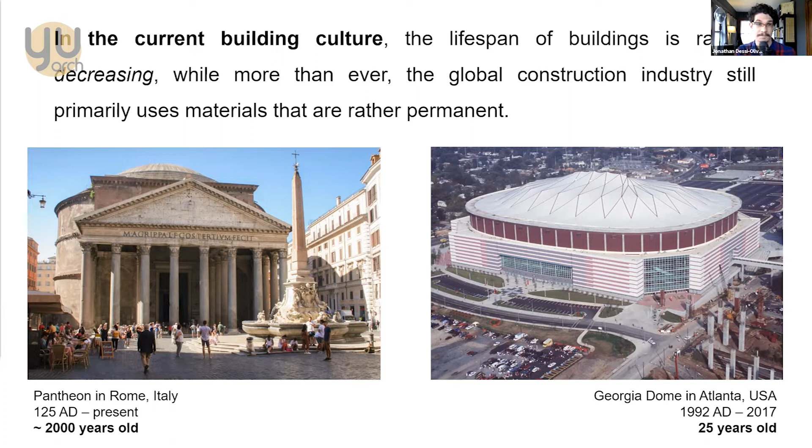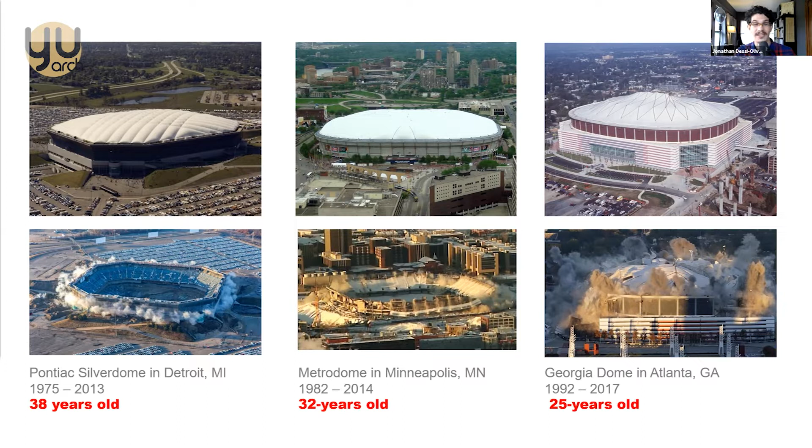And the truth is that this is a problem. Buildings are dying young. In the United States, we have a whole collection of these inflatable stadia that have died, been demolished within 40 years. This is a common trend. The contribution of my country in terms of landfill waste is in the order of 600 million tons of construction and demolition waste in 2018.

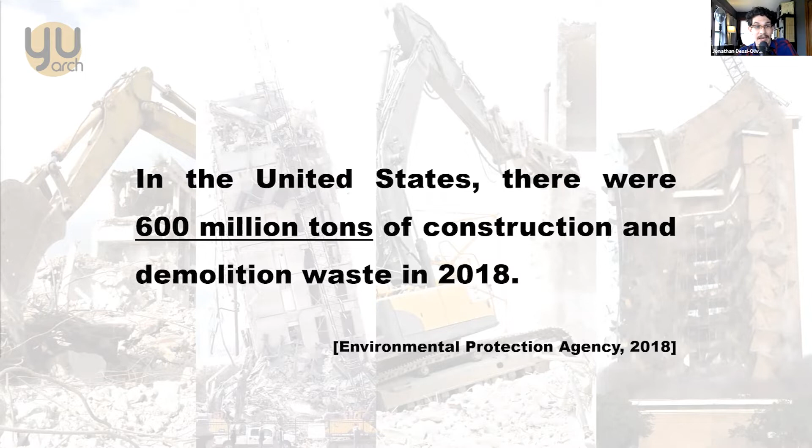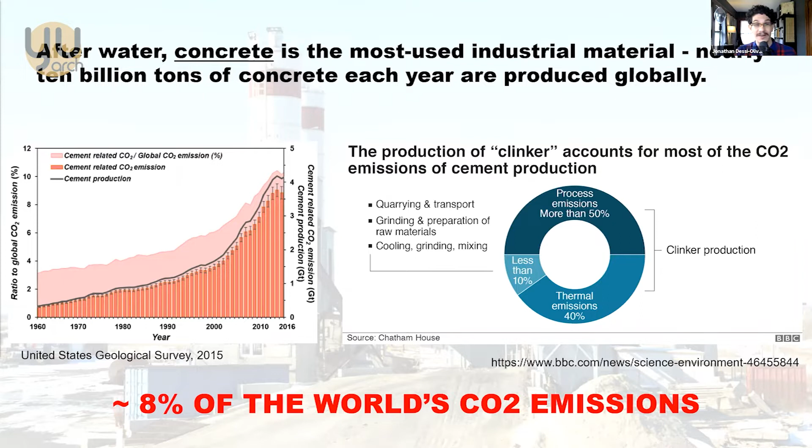This is only going up. I feel like there is an urgency because concrete use is on the rise. It's the next most used material after water, and we are not really slowing down our use of concrete.

Meanwhile, we're feeling the effects of climate change now. At least in my country, on the West Coast, we're having fires that are ruining places. There was a fire in 2018 that destroyed 18,800 buildings. Whether or not those buildings were all being used doesn't matter—that means there's a lot of work for architects to do.

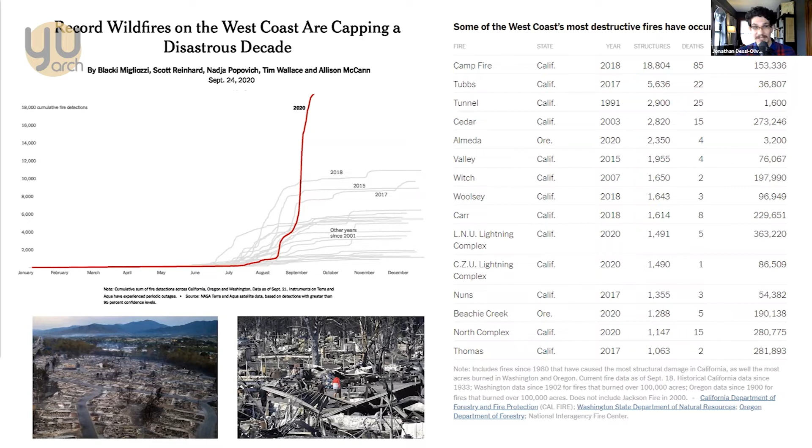And I think we have to ask: how are we building in the face of these challenges?

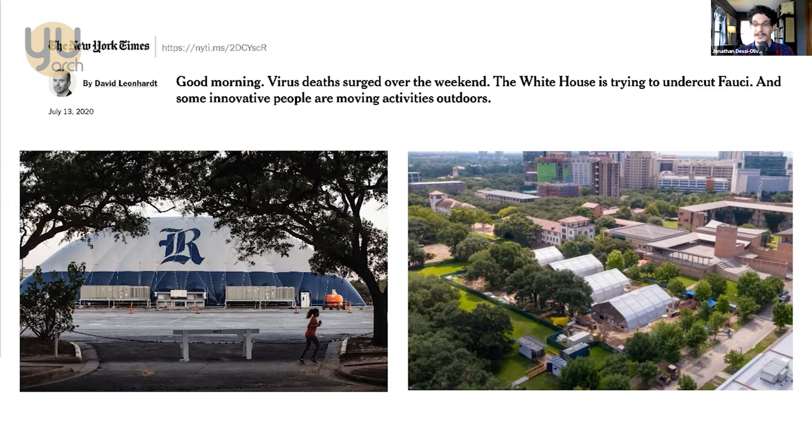Even just in the last year, we're finding that we have to change the way we work and change the environments in which we work. Universities around the United States were building inflatable structures using plastic materials to make temporary structures. We have to wonder, if something is so temporary, or expected to be, why use materials that are permanent? Or if the condition of pandemic is a permanent condition, how do we have to change how we build?

So this is a very big question, and for me this is one that has always been at the front of my thinking, and has been the motivation not only for learning to build, but for beginning to ask big, difficult questions about what we are doing when we build architecture today.

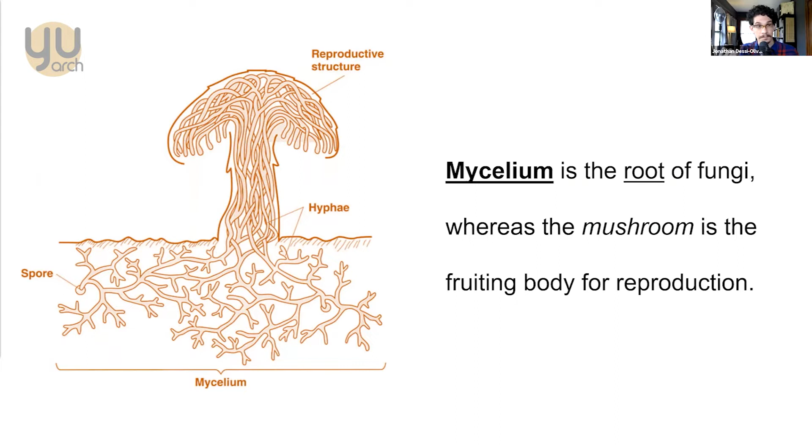To be clear, it is the root of fungi. The mushroom, the thing that we eat, the thing you find on the ground—and yes, there are some dangerous ones, but there are a lot of really good ones—the mushroom is the fruiting body, or the reproductive organ. So we're not interested in the fungi as a reproductive body, nor as a food, but actually as a binder, as a network of what are called hyphae.

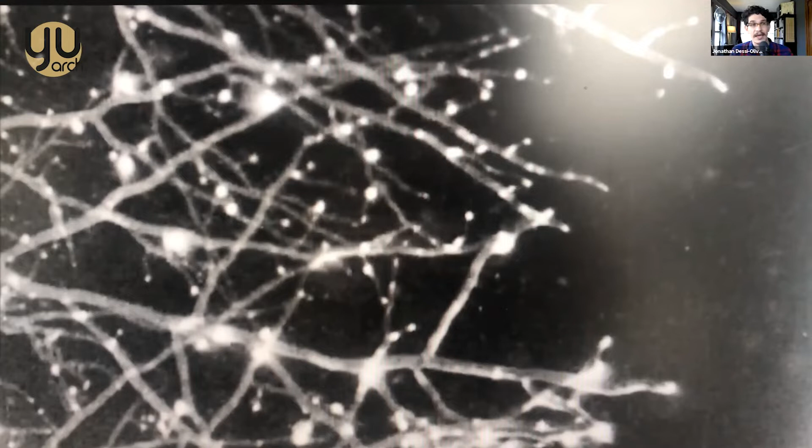The largest living organism in the world is a fungus, and it lives on top of a mountain in Oregon on the west coast of the United States. It's something like 5 kilometers wide—really big. In the end, mycelium is actually what sustains the planet in many ways. It links everything underneath us. It's integral to the way our environments grow and thrive. They help distribute nutrients between trees and other plants, and they also decompose in order to make other life possible.

Now, that's all very exciting, but in our context we're trying to control the mycelium as much as possible in a monoculture—a single organism making a single kind of material, growing in its food source, which we use primarily as a mass. For us as architects thinking about building materials, we see it as a means of decarbonization through sustainable materials that take agricultural waste, something not favorable in certain industries, and give it value.

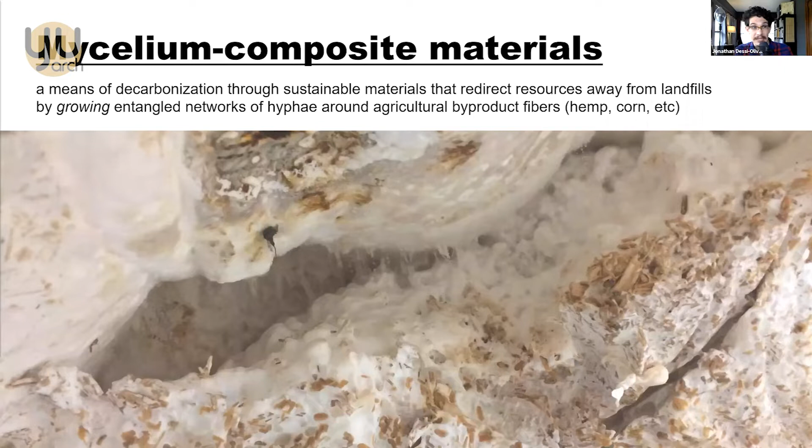So we grow these entangled networks of hyphae—these white things growing in the image you're seeing here. We grow them around agricultural byproducts, like hemp, corn, and almost anything that contains cellulose and lignin, which is going to be a favorable material in this context.

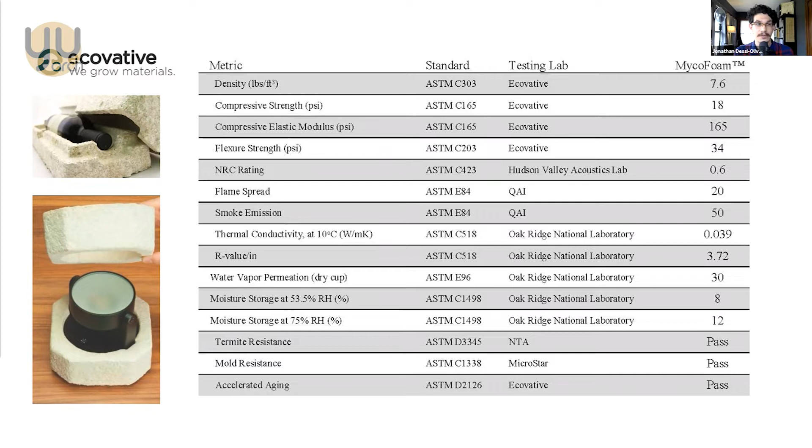Now, mycelium as a material is commercialized. It's patented. People are making extreme amounts of money off of this material, selling it to consumers. It has been tested extensively for its mechanical properties, as well as its insulation value. Its acoustical properties have been explored a little bit. We also know that it has termite resistance, mold resistance, and in fact some fire resistance as well, at least enough to compete with many of the materials we use day to day.

Now, as consumers, I think in Europe you can get some from a company called Grown Bio. I believe they're in the Netherlands, so you could actually order some there. As a consumer, it will come looking a little bit like this: a dehydrated bag that looks like farm waste. And you say, why did I spend so much money on this farm waste?

So you introduce water and just kitchen flour, the stuff you bake with, wheat flour. In a matter of 5 or 6 days after introducing that into the bag, you have a material that you can pull apart, put into a mold, grow for an additional 5 or 6 days, and have an object in any shape you make it. It's like casting concrete or plaster or anything else. What's amazing is that there's very little energy needed in this case. Mushrooms need darkness, humidity, and oxygen. That's about it, so you don't even need electricity to make this happen, which is rather wonderful.

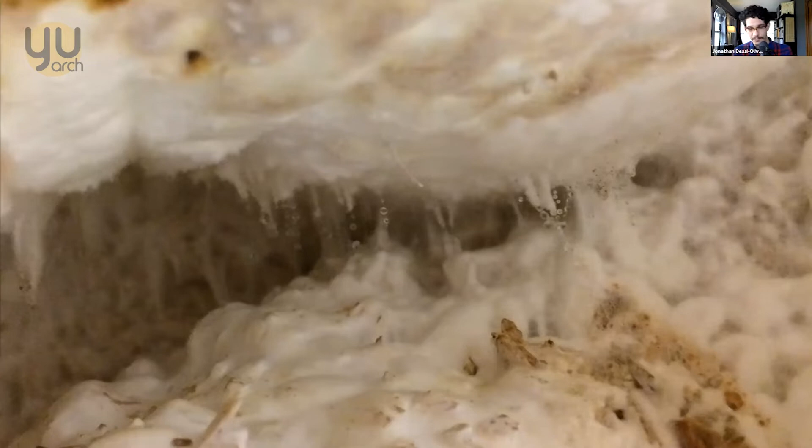So it is this very strange stuff, but people have been working with it for quite a while now. For almost a decade, people have been making things like furniture, lampshades. A brilliant young woman made a canoe, this little boat, and I don't know how long it lasted, but she made it. It's actually rather remarkable. A number of academic projects have made modular brick systems, acoustical panels, and in fashion particularly, there's quite a race to make fabric products that approximate the qualities of leather, so rather than raising cows, we could actually grow our leather-like products. There's quite a bit out there.

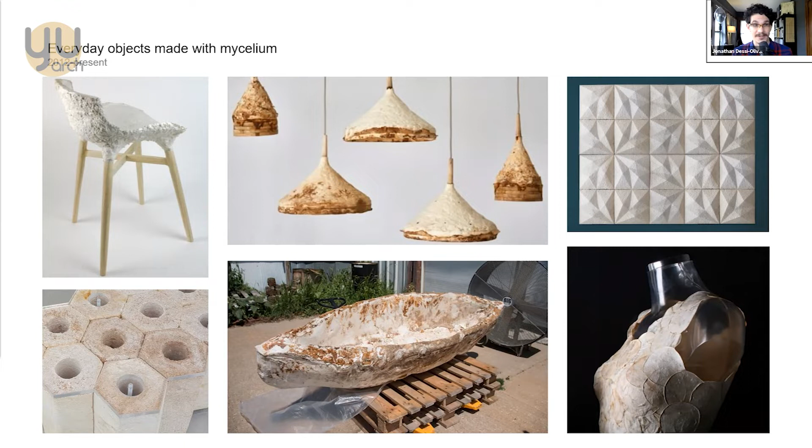Now, in the context of architecture, I think it's important to bring it here quickly. The notion of myco-architecture, mycelium architecture, was actually coined by an artist, Philip Ross, in 2009. He was interested in mushrooms, had been growing them a little bit, and it occurred to him that the block from which the mushrooms grew could just be used as a building block. So he made an art installation, I believe in Germany, back in 2009, where he built this little vault in the shape of a catenary. I'll talk about that shape here in a little bit.

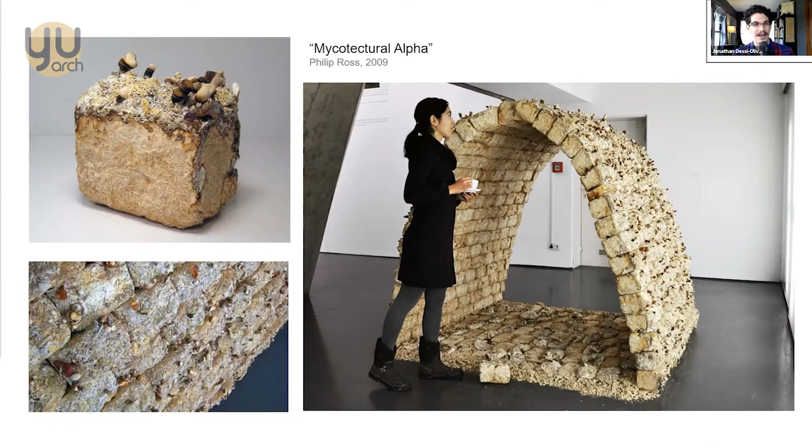More famous, perhaps, is the effort by David Benjamin, the Hy-Fi, a tall tower that stood for between 3 and 6 weeks in New York City back in 2014. This one was made with 10,000 mycelium bricks. The entire industry of how to make mycelium materials had to be elevated just for this project. The ability to grow this much material and produce this kind of building block never existed before this project, and this project was actually essential to the work that happened after that.

And so since 2014, we see numerous pavilions now using this material in many different ways, some more structural than others. I would say certainly the structure by the Block Research Group, displayed at the Seoul Biennale in 2017, is probably the most structural. These ones by Carlo Ratti are also quite good, they were in Milan two years ago. These other ones are using mycelium as a unitized item, but perhaps less for structure and more as an enclosure kind of system.

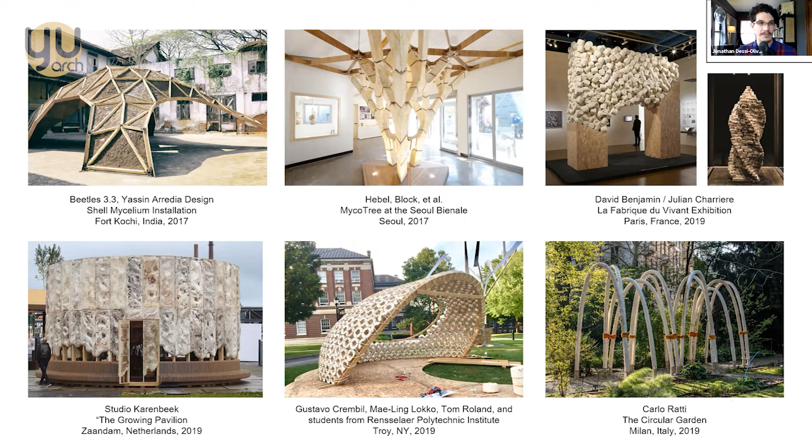But as someone who was, through my academic career and in particular my postgraduate studies, learning how to ask research questions, I looked at the field of people making pavilions and said, what isn't being done? It's a new material, so what has not been done? The answer was that it hadn't been used like concrete. It had been used like concrete block, but not like concrete. No one had cast an extreme amount of material all at once to make a structure.

So structures had been proven. There was no question that a material so weak, made of straw essentially, could actually make a structure.

Now my confidence in the ability to make a structure like that comes from my work in masonry. This is a compressed earth vault structure that I displayed at the Venice Biennale in 2016. It was really an entire demonstration of my philosophy and approach to my work in construction.

The first being that I learn from history. I look at, and I actually build, historical structures as a means of trying to think about ways of building in the future. I don't just study them, I actually build, because I believe validation through construction itself is essential in order to make progress and to change minds of people who are resistant to changing the ways that we build today, or with what materials.

The next is to compute efficient forms. History can teach us about efficient forms because there were technological limitations. If we can take ourselves back to those limitations and understand them as opportunities, there's quite a bit we can do to change the way we build for the better, to use less material or more sustainable materials, such as earth, or indeed mushrooms.

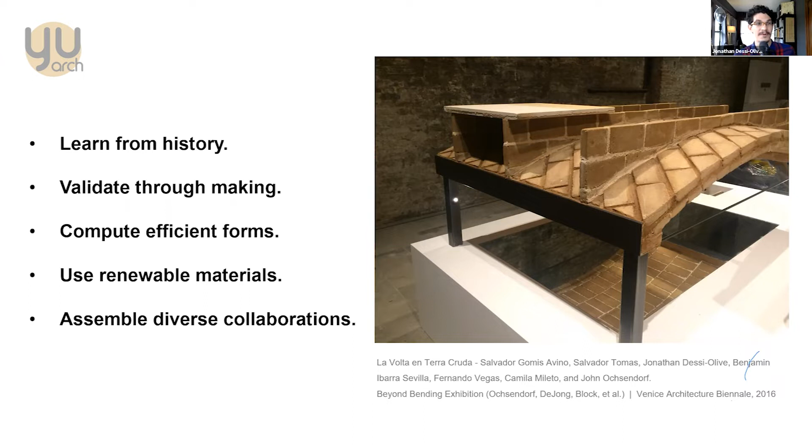And the last one has been most important to me in the last couple years, which is to assemble diverse collaborations. I consider myself a builder or craftsperson, at best a designer, almost not an architect, definitely a researcher and an educator. But what I've found is that it's through working with people who do things I don't know how to do that I can get quite a bit more done.

There is a close study of history and historical forms, but immediately a departure into alternative materials, whether it's the use of earth, lightweight concrete, which I'll talk about later, or this move to lightweight materials using air or this material, mycelium.

Within the course of that work, the most important part of what I did early on as a student to motivate myself was to study this history, in particular the history of the Rafael Guastavino company. If you don't know the Guastavinos, they are a father and son team who came from Valencia, Spain, and emigrated in the late 1800s to the United States, to New York City.

He came equipped with knowledge of a historical construction method that was very common in Spain and, in fact, all around the Mediterranean, which is that of tile vaulting. I'll describe that a little bit more in a second.

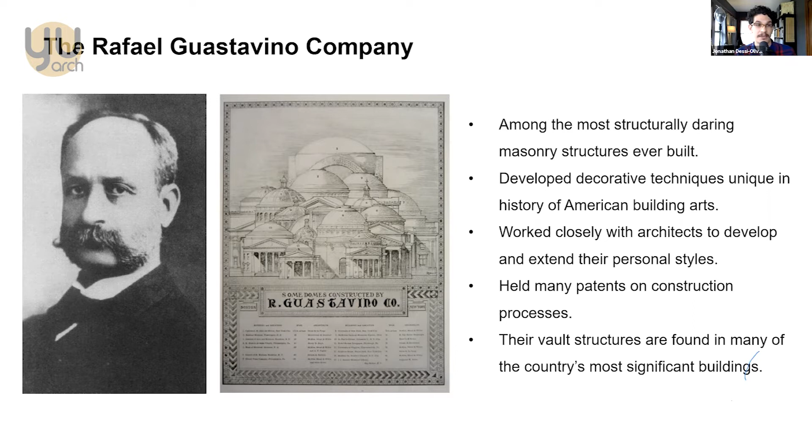And so what you have is this incredibly rich tradition of historical techniques being used in the United States at a time when most buildings were made of wood and were burning down like crazy. So the Guastavinos stepped in with a fireproof system that ultimately comes from as far back, at least on record, as the 1300s in Valencia.

And so the Guastavinos aren't doing anything that crazy. They're using multiple layers of very thin ceramic tiles. The initial layer is laid with gypsum or plaster of Paris, a very rapid setting mortar where they can almost glue bricks to one another using very little formwork. And so it's very quick to build. The next layers, the second, third, fourth, or even more depending on your span, are laid then with concrete.

This was a major innovation in terms of Guastavino's use of the system. Previously, lime or more gypsum was used. But in the context of the United States, where in the early 1900s, right when the Industrial Revolution was going quite strong, concrete was available there more than almost anywhere else. And he was able to use, at that time, an innovative and new material in his traditional construction method.

And in the end, what he makes is a construction method that is very quick. It requires almost no formwork, so no scaffolding or additional materials, mostly, to build. Extremely lightweight and strong, formally flexible, and of course, most importantly in his context, fireproof.

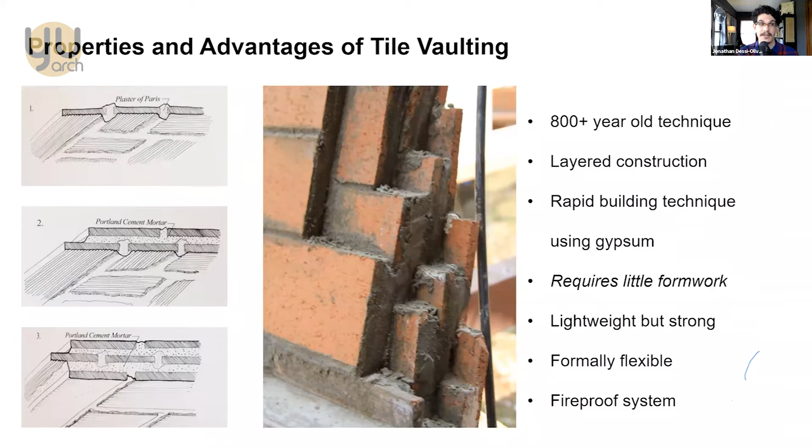And so, how do you start to make something new? This construction system did not exist prior to Guastavino in the United States. It is truly an immigrant's import, right? An immigrant imported this thing, and very importantly. So how does he go from building, there's none of them anywhere in the United States, to 1,000 of them? How do you do this?

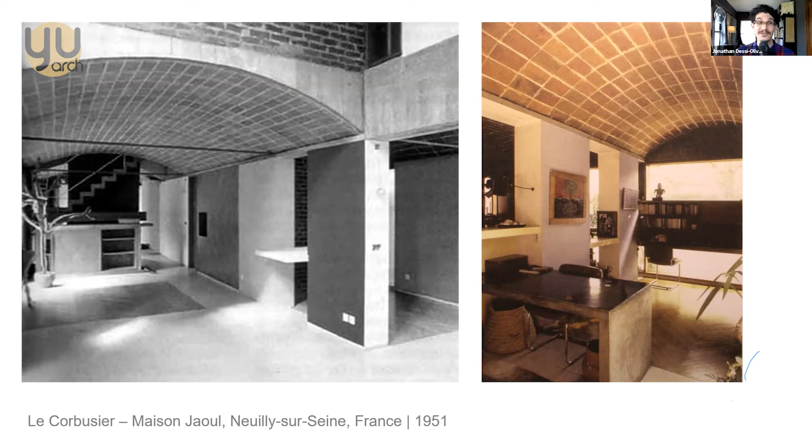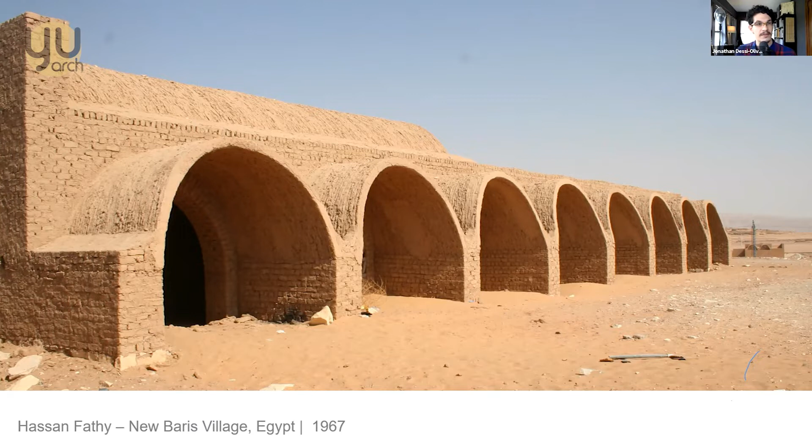Now, I want to stress, however, they were not the only ones doing this. Corbusier used this in a very strange but very interesting house in France in 1951. If you've ever been to Cuba, you can go visit a wonderful but a little bit dilapidated site that uses the exact same construction method for a number of schools, art schools that are there, commissioned by Castro. In Egypt, Hassan Fathy uses a very similar method of using thin brick, in this case made of compressed earth, and using them in a slightly alternate method called the leaning brick method, which is more well known, at least in the Middle Eastern regions.

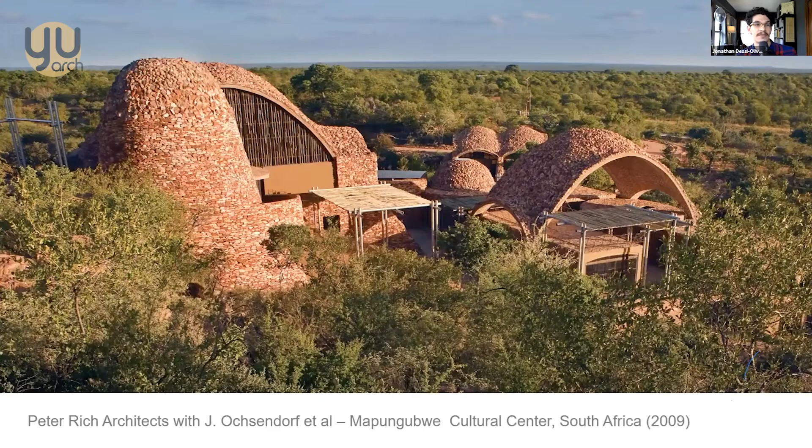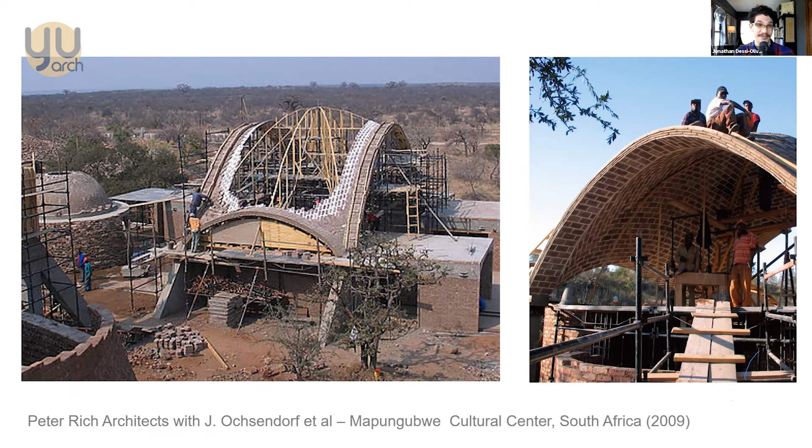But of course, this is not something that has died. As recently as 2009, earthen materials were used in South Africa to make these very vaults. Now, why am I talking so much about vaults? I should be talking about mycelium. The reason is that the principles of vault making apply to everything else, especially materials that are quite weak. And we know this because of the properties of unreinforced masonry, which is that they only work in compression.

Stability is actually determined more by geometry than by material strength. This means that even if you have a very weak material, if you can put that material in space exactly, or almost exactly, in the right shape, then you'll be okay. Historically, this has been done for at least 2,000 years, because the Pantheon is still with us today.

And is proof that putting material in the right place in space can really do something. So how do you find compression forms? Well, as far back as 1675, the British scientist Robert Hooke, the same scientist who formalized the physics of the spring, had an intuition at some point. He was writing a paper on helioscopes.

And I guess while he was thinking about helioscopes, he decided that probably he could formalize, but maybe not with mathematics yet, that the shape of a chain hanging in tension had an equal and opposite relationship to an arch in compression. This meant the amount of tension in that chain was the equal amount of compression in that arch as it was standing. He wrote this in Latin, in an anagram, hidden in the margin of this other paper. He wrote: 'As hangs the flexible line, so but inversed will stand the rigid arch.'

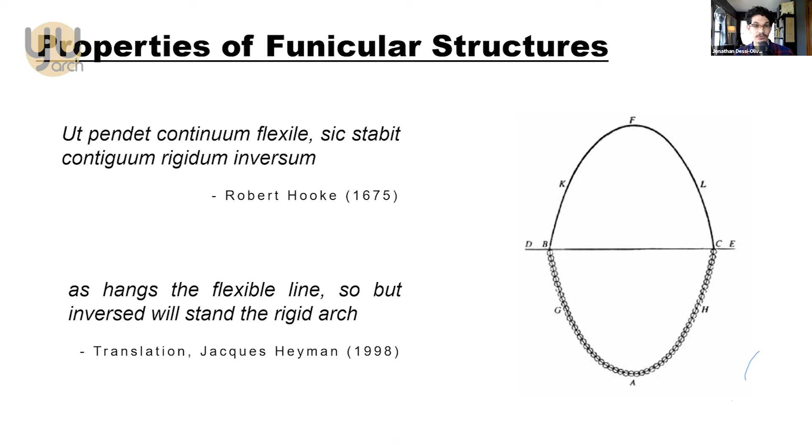At the time, there were no mathematics to prove this, and it wasn't proven until much later that this is actually true. But what it does is set out the basic attitude for how to make compression shapes. This is the fundamental property that has guided all vault structures for thousands of years, and it's really quite powerful.

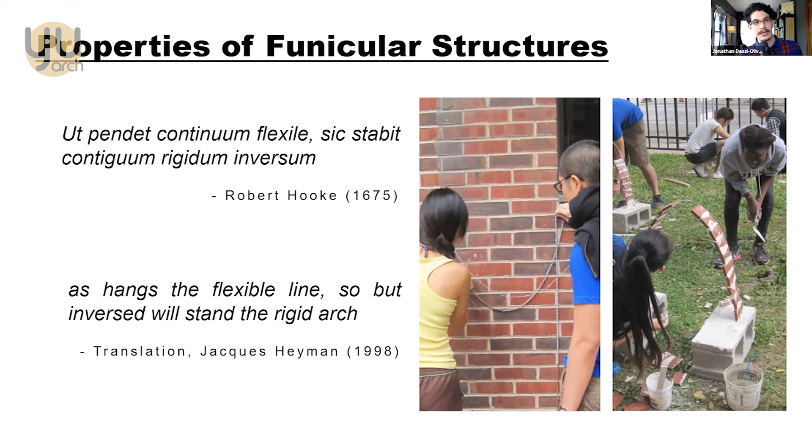It's something I've really worked with intimately, and something I've also taught. If you have the shape of a hanging chain, and you have a very strong material—brick is very strong, relatively—it can be a very thin structure. If you can put the bricks exactly in the shape of a hanging chain, you'll have a thin yet very strong structure. Now in the case of a mushroom material, you have a very weak material.

But using the properties of a hanging chain, confirmed with calculation methods such as graphic statics, by using simply more material in that same shape, one can achieve the same structure. So a weak material needs a lot of material, a very strong material needs just less, that's all. And if that material can be sustainable or renewable or even compostable, as this material is, then using a lot of it could be ethically perhaps better.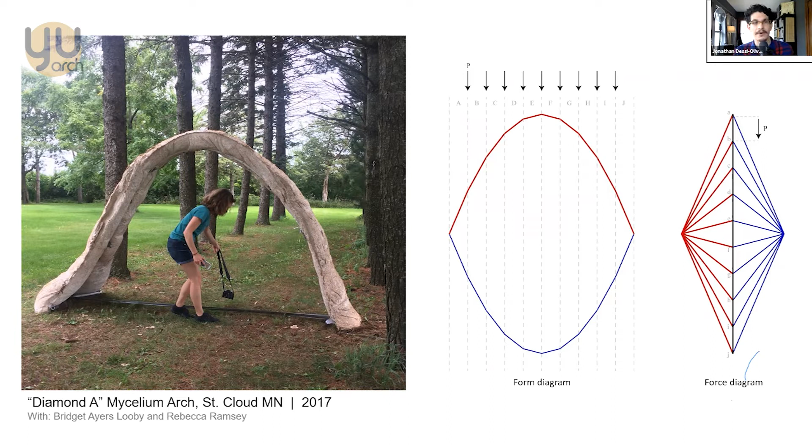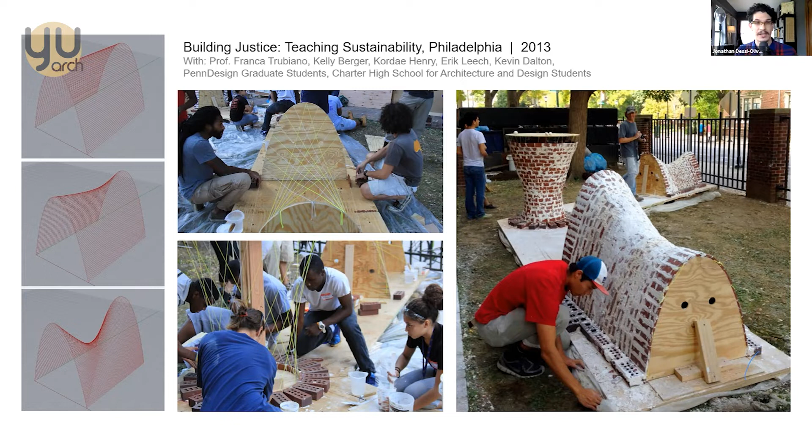Now, the arch is certainly a powerful tool, but then we can use the arch in interesting ways. This is something I would teach as far back as 2013. I did a workshop with high school students in Philadelphia. I taught them tile vaulting in 2 days, and they made these wonderful little dog houses that were very complex in curvature, but based on the principle of that hanging chain shape.

This is also something I brought—I was inspired by that project I showed that was in South Africa, and I brought my own ideas to Kenya in 2013 and worked with craftspeople there, interfacing with the way they built and sharing geometries with them, in an effort to make more efficient structures on the island, but using their techniques.

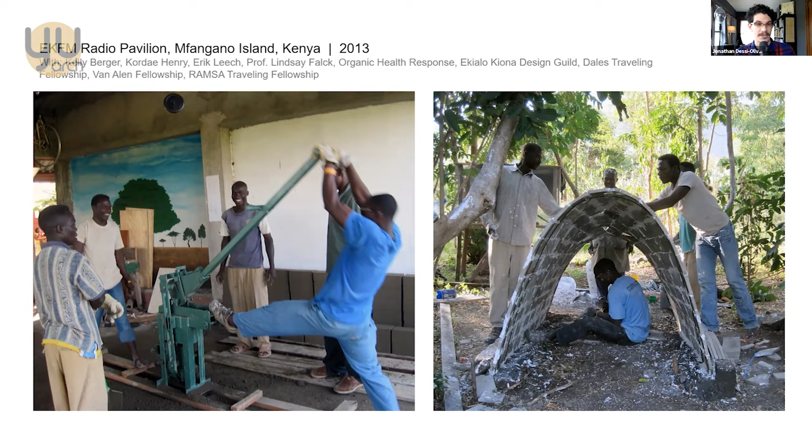Here we're using compressed earth, gathered right where we were building, mixed only with a little bit of concrete, compressed using that press. And we built this very, very thin tile vault. We also applied that shape to concrete—we made a very thin concrete vault, which turned into a radio station.

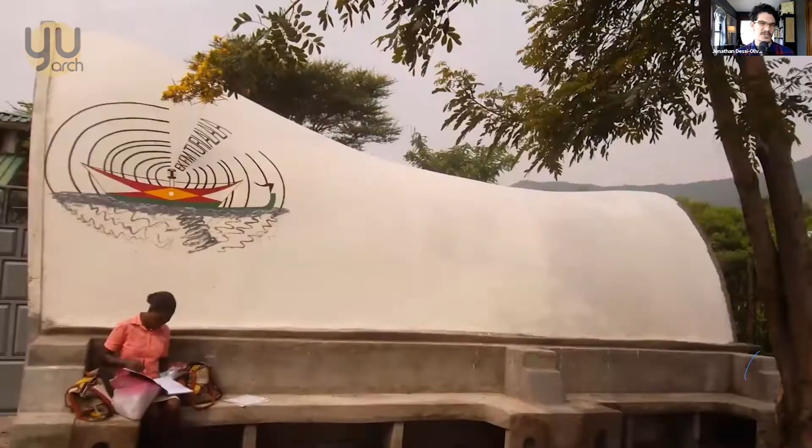Now, as we start to understand that the shape of the hanging chain, we know we can extend it even further. Masters such as Gaudi and Isler have used techniques that take this principle and extend it into 3 dimensions. What's wonderful is now we have computational tools, digital tools within computer programs that we use as architecture students, that can help us find these complex and curving shapes. By simply trying to understand how to build, we can take for granted that a shape that is hanging can stand.

One only needs to concern themselves with the thickness of the construction and the strength of the material at that point. This vault was one that I built when I was a student between 2015 and 2016, and here the idea was using lightweight concrete, aerated concrete, so it's got like bubbles in it.

And so we used this extremely lightweight material, and we said, how can we eliminate altogether the formwork, the necessity to actually describe that complex shape in space? So we used fiberglass rods as a means of visually delineating the shape, but everything else was basically the structure holding itself up. The question was, how do we take a flexible object and control that shape just enough to make something that will, in fact, stand? So this project used a combination of that flexible material and a very lightweight material.

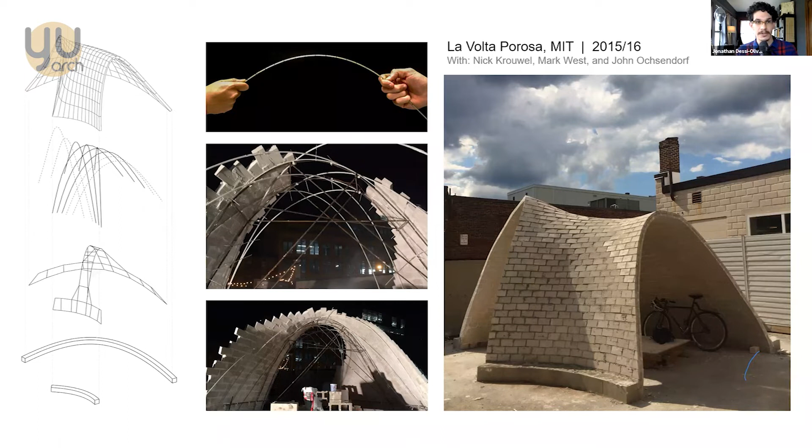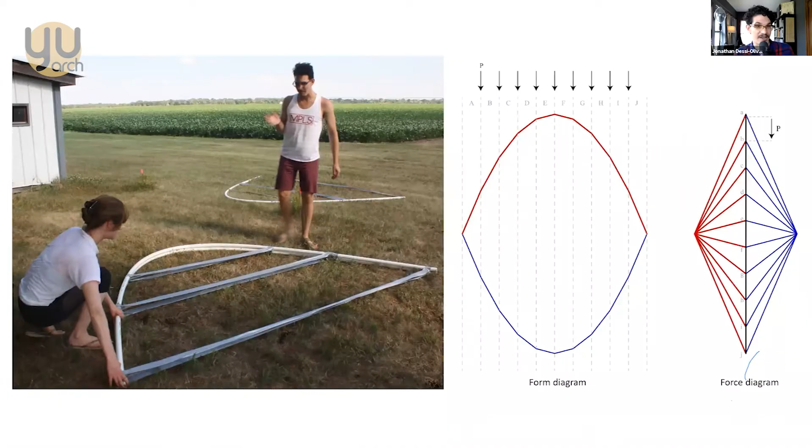This inspired the process of this Mycelium Arch. We used, in this case, PVC pipes. We bent them into the shape of a hanging chain and fairly crudely put things together. This is using plastic and tape just to hold in this hemp material that had the mushroom already in it. It worked, except it didn't.

Construction experimentation requires failure. Otherwise, there's no progress. If something works, you have no idea what's going on. You need something to fall down in order to know better what's going on. In this case, I was not present as the master mason or master builder to observe the construction while it was happening. And so actually the arch was packed floating. One of the lower ends of the arch was not touching the ground. So when we removed the structure, it settled and it changed shape. And because it was a weak material at that point, not in the right shape, it did in fact collapse.

This was knowledge that I then brought with me into the context of the classroom. With some students at Georgia Tech, I had a class teaching structural design, structural form finding, in the context of computational design, and we applied those concepts to mycelium. My students generated a shape using Rhino Vault, which is a plugin for Rhinoceros that you can download. I think it's free, in fact. And there's a new one for the current Rhino.

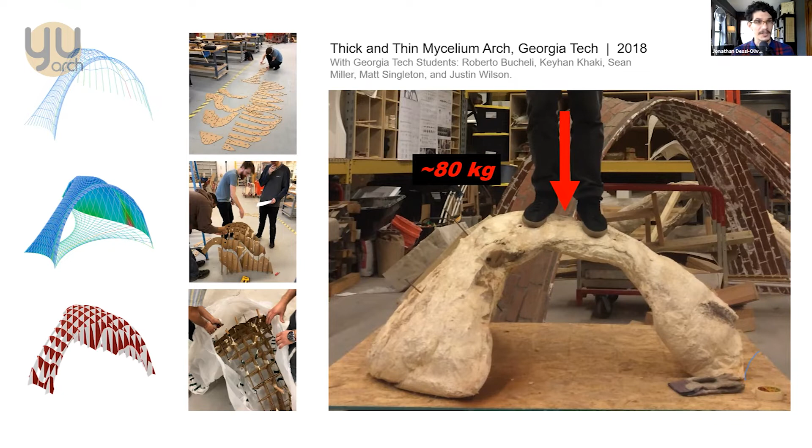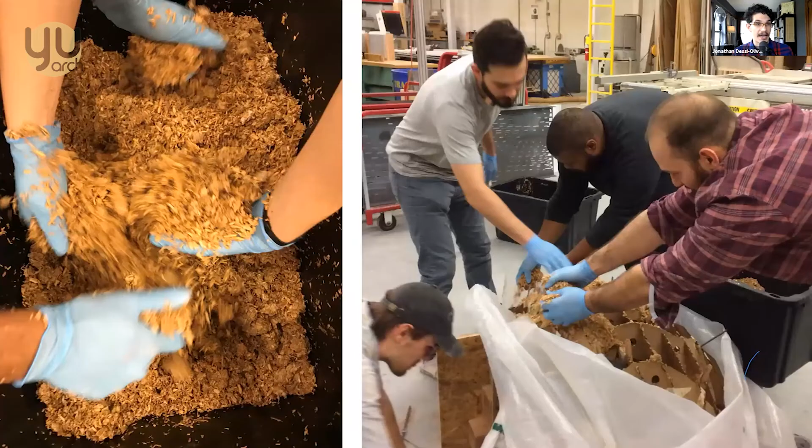And again, the methods are fairly primitive at this point. So again, cardboard is being used, again a waste material. I believe this cardboard was used as packaging for a delivery in the workshop there. So they used that. Here they are, pulling the strands apart.

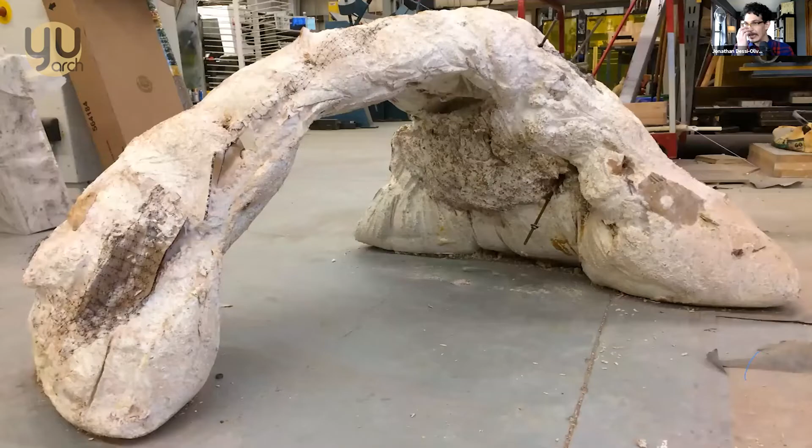So here you're seeing hemp that already has the mushroom in it. It's being pulled apart. We have to wear gloves because you want to try to reduce contamination of other organisms. And you can see very simply, just packing the material in. They're using plastic just to contain it, very crudely. And as such, it's not that attractive. I would say it's actually quite ugly, but fascinatingly so.

But there are very important lessons, even in something that's quite ugly, which is that a three-dimensional shape does have more stability, certainly more than the two-dimensional hanging chain. And so there are more diverse load paths in something like this. So you can actually have a little bit more imprecision in your construction by having a three-dimensional or a doubly curved shape.

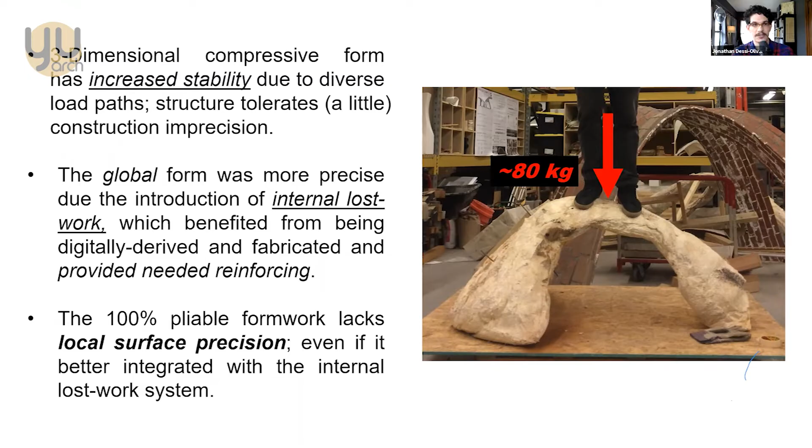It's a little bit more forgiving. The internal skeleton was also extremely important. We were thinking about going from something like this, which is the size of a chair, to making something that's the size of a building - what do you do? The last thing is that we wanted to address the ugliness. We liked using a flexible formwork, but we knew we also needed some control. That experiment was exactly what we needed to make this thing.

So what is this thing? It's an approximation of what I call a funicular fan vault, inspired by a British style of the Gothic. It contains nearly 3 cubic meters of mycelium, and it's hemp-based - these are hemp stalks bound together with a fungus.

The formwork consisted of plywood with some waterproofing membrane, to make the rigid formwork on the outside. On the inside, we used a woven geotextile to form those ripples that you see. Inside, there was a digitally designed and fabricated wood skeleton.

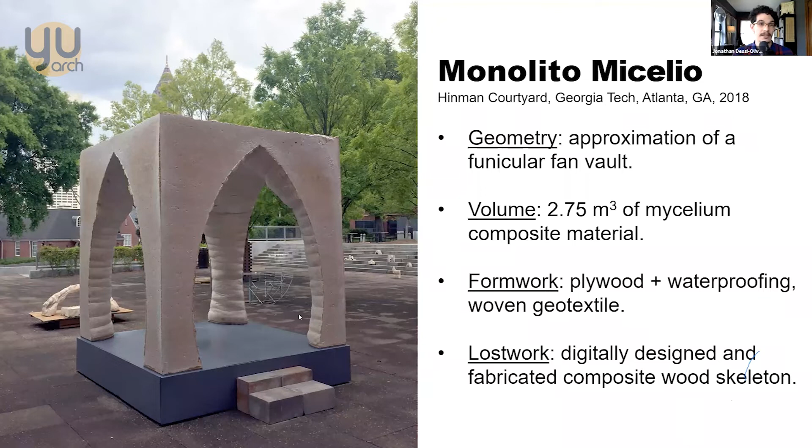Before I show anything else, I have to say that this work has been ongoing for a very long time, and it's not something I've done alone. There are a lot of names, 2 universities, and countless hours of others that have gone into this work. I can't go further without having you read through a few of these names to recognize that diverse collaborations are essential for doing work at all. As architects, you will be collaborating with people, and better yet, with people who are not architects. I think this is important to put up there for a second.

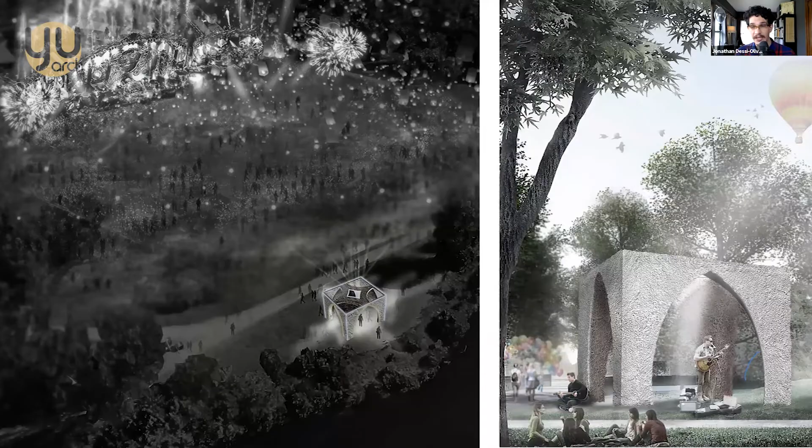The pavilion was designed and built in the context of a seminar - these were my students at Georgia Tech. Part of the project was we actually designed the thing, in the context of a music festival. So it was rather large.

We submitted this - they had an open call for art at this music festival, one we found in the United States. The students made a construction schedule: when it was going to be put out, how we'd put it up, when we'd take it down, what we'd do with it afterward. Funny enough, the festival organizers emailed me back and said, wow, this is wonderful, but we were just looking for paintings to hang in the woods. So maybe not this year, but we'd love to talk more. We never heard from them again.

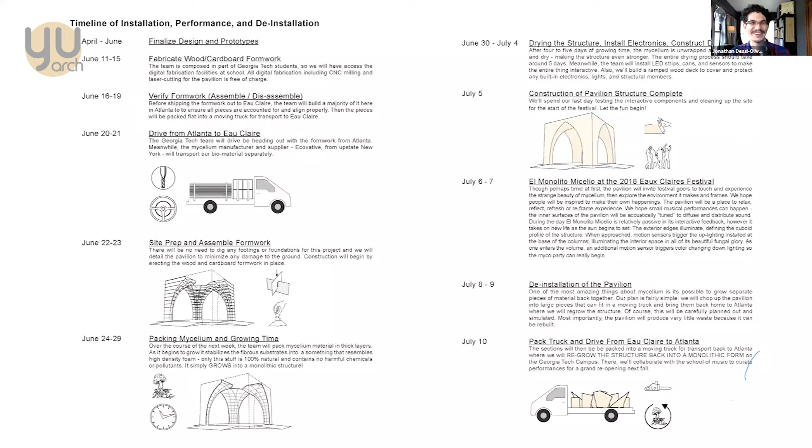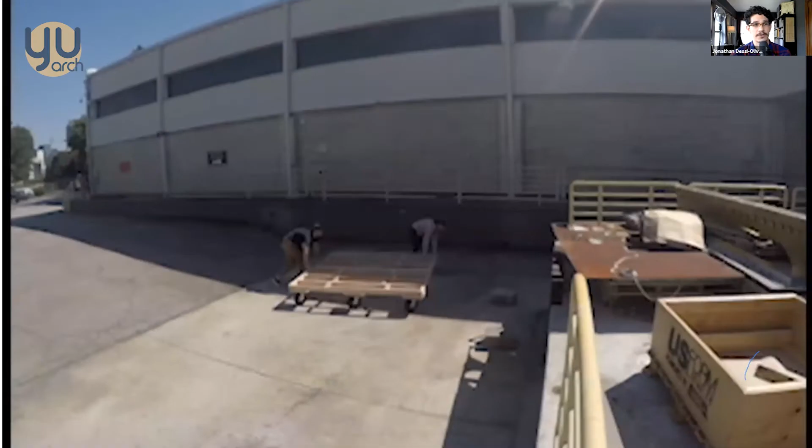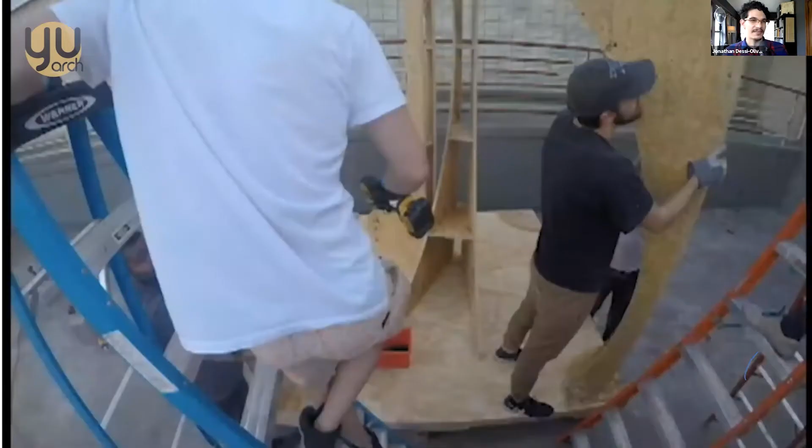But luckily I had some funding, and by the end of the semester we were able to construct this thing. Now, at Georgia Tech, where I was doing my fellowship, the workshop where we could construct things was in a different place than the architecture school. So from the beginning, the structure had to be more like a parade float - it had to be on wheels so we could push it.

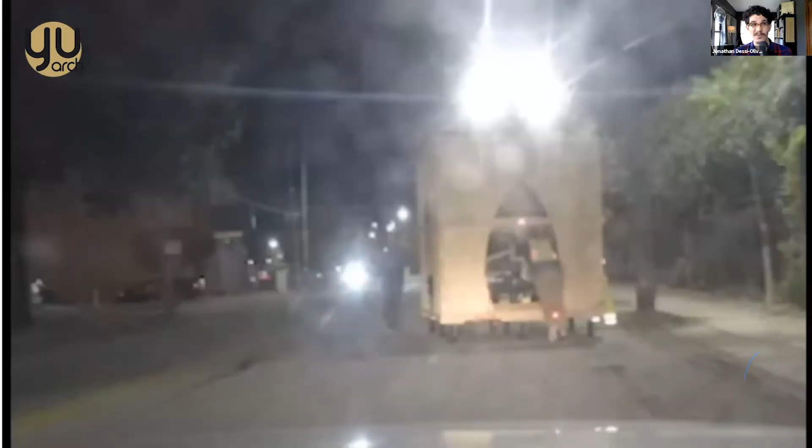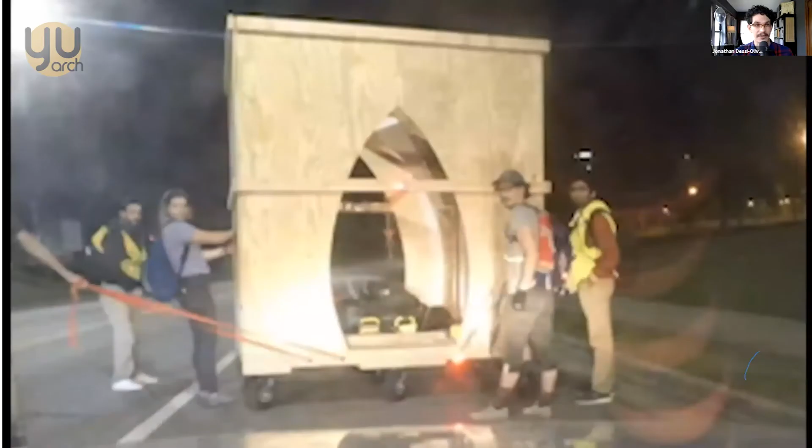Here you're seeing us build that internal skeleton. The first night we worked quite late. Here you can see the external plywood formwork. At about 2 a.m., because we knew the material was arriving the next day, we started to push it down the streets of Atlanta. Of course, the police showed up because it was an unidentified moving object in the streets. These were campus police though, and they were a little friendlier than you might expect - they actually helped us, stopping traffic for us.

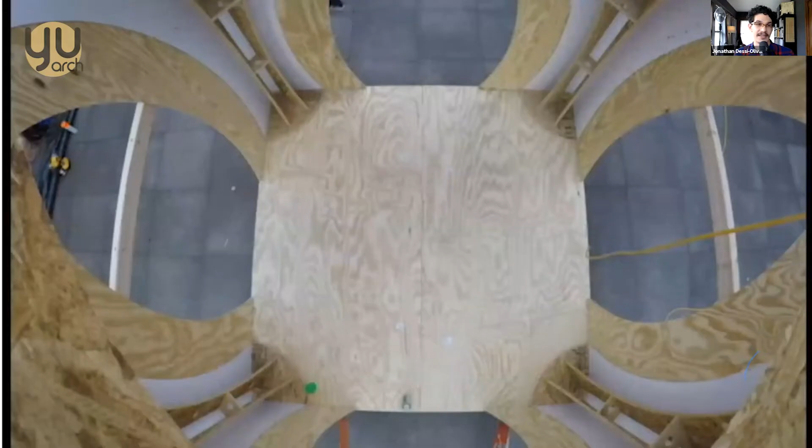We ended up calling it the skeleton parade - it was the skeleton of the structure that paraded through the streets of Atlanta, only to be very ceremoniously packed the next day. Packing mycelium consists of using geotextile fabric and attaching it to the exterior plywood. There's a whole set of activities going on the outside of the structure involving pulling mushrooms apart, introducing flour and water, and then giving it to me and Sean, who were basically packing the whole thing.

It's a lot of work. It took a very long time. Of course, when you're working with students, they get hungry, so we had to order food, maybe stop to eat, take a look at what we were doing, only to start back up again.

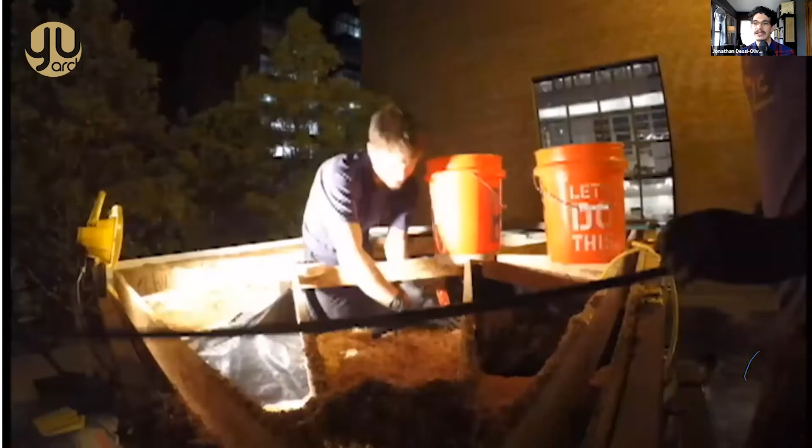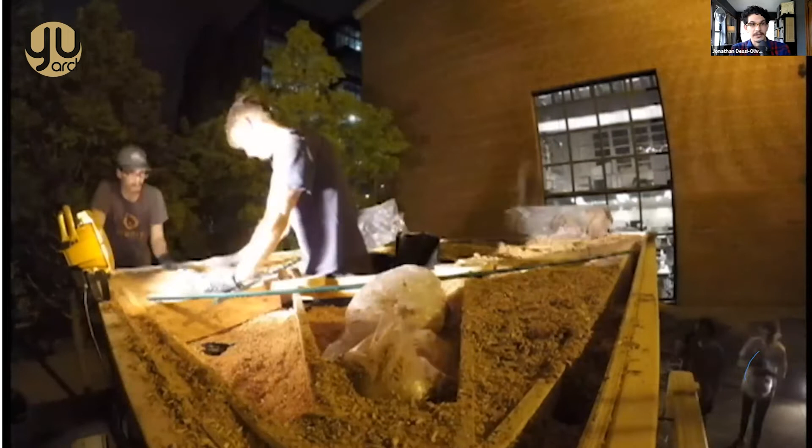Here you can see us at the top, beginning to fill it up, using that internal skeleton as a way of guiding the fabric on the inside. Now, 3 cubic meters is a lot of material to pull apart and pack, and remember that it's alive at this moment, so you cannot stop. It's worse than concrete - you can't stop. It took us 14 hours to pack this thing.

I went home at 7 a.m. But it's really the experience - the experience is a part of it. The experience of making it, of course, then the experience of exhibiting it.

Better yet, the experience of seeing a group of singers sing underneath it and tell you, hey, it sounded pretty good under there. So again, for me, I do these projects not to celebrate them, but to learn from them.

So I'd like to spend the last little bit talking about some challenges, things that if you wanted to make a structure like this, at least from my own experience, you have to consider. I'll break it down in terms of materials, design, formwork, and reinforcing.

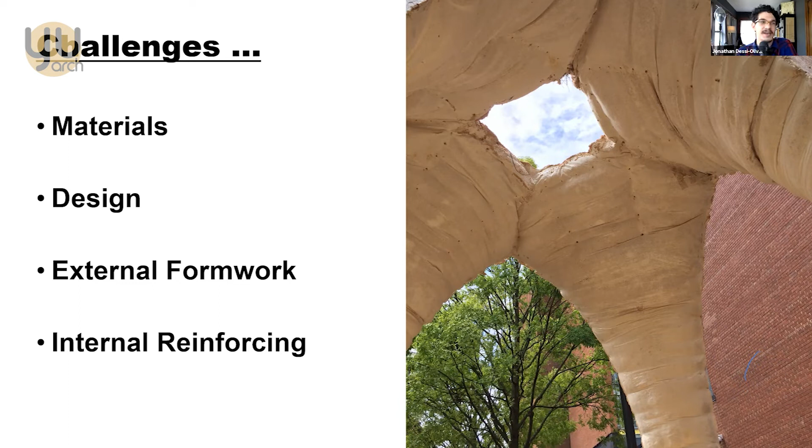Let's remember we are working with living materials, which makes them extremely difficult to cultivate on a building site, which tends to be fairly dirty. We need almost a lab environment to grow these things. When they're dehydrated, there's a process of reanimation that takes several days, numerous hours, filling little bags with water and flour and letting them grow. There's an immense risk at that point because you can have infections and other things.

If you use live material, as we did, it was bags that were already alive, shipped to us the next day from the company to my university. That was very expensive because they're wet bags - imagine agricultural waste full of water in bags being shipped several miles the next day. They're in upstate New York, and we were down south in Atlanta, so it's quite a distance - 1,500 kilometers at least.

So that is something to consider. How do you get those materials? Are you cultivating them yourself? Are you buying them from somewhere and shipping them live? That's a huge cost, so these are things to consider right up front.

Now, because they're alive, storing them is almost impossible unless you have a refrigerator the size of a building. If you're going to cast a building's worth of material, you have to keep them cold unless you use them immediately. We had almost 200 bags, and we had to use them that day, and that's why we packed for 14 hours, only stopping for dinner in the middle of the night.

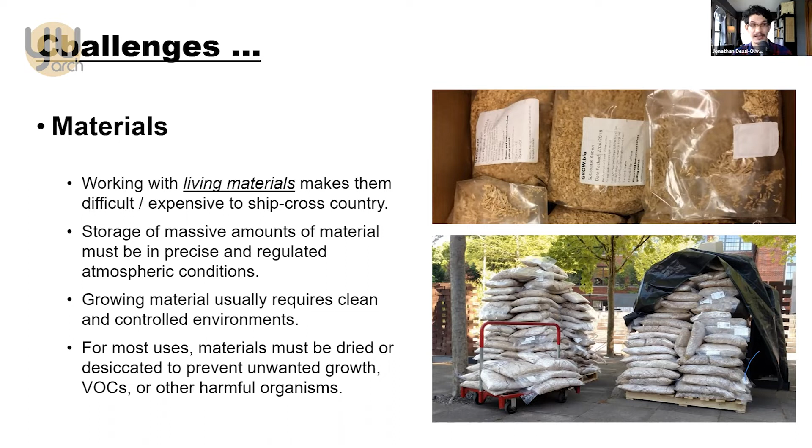And so leaving them alive presents a risk of other organisms coming in and thriving in an environment that is wet, full of oxygen, and full of lots of food - sugar, cellulose, glucose, all of these things - really prime for mold and other bacteria. So these are very, very challenging things that have to do with the material itself.

Now, remember, the material is very weak, so when you're designing something, you have to keep that in mind. Structures made of mycelium will most likely be best in compression, and this is why I went on for quite some time about the shape of a hanging chain, as well as masonry vault structures - because history will inform very directly how to use a new material.

A very weak material with all of these limitations - we can actually apply historical concepts and make it work. Now, when you're dealing with thickness, because it's growing, it can be very challenging. Anything thicker than about 15 centimeters is very difficult to grow, because through that construction you have less and less oxygen. If you want that mushroom to grow all the way through, you need to provide oxygen on all sides of your mold - so if you think about a mold, perhaps it's 5 sides, like to make a brick.

The top could be breathing, but the other sides are not. So anything thicker than 15 centimeters at the very bottom may not be breathing and may not grow at all. This is very challenging, because you have a weak material that must be thick in order to span long distances, but you can't grow thick if you want it to grow all the way through. So the optimization here is quite a challenge, but a lot of fun.

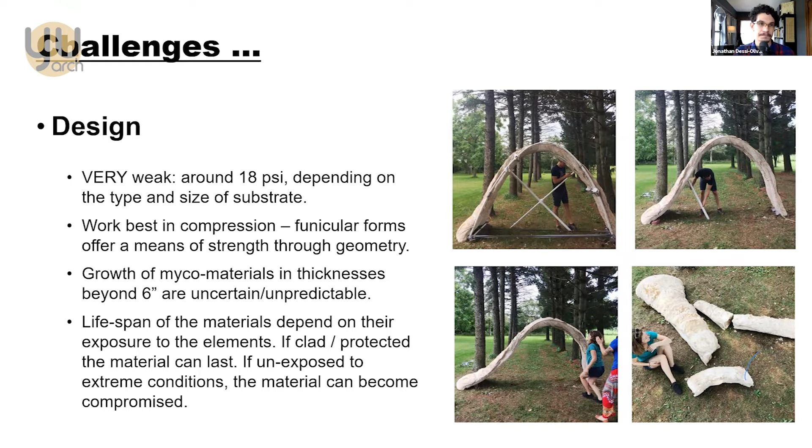So the design of our pavilion, as I said, was inspired by the chapel at King's College. This was my own take on a British Gothic vault, at least. At the time, it was the last vault shape that I could think of that I hadn't built. I'd built freeform, I'd built a cross vault, I'd built barrel vaults, and I'd never built one of these. And so it occurred to me in the middle of teaching this seminar that...

Wow, isn't it wonderful? A British fan vault is like a mushroom-shaped column cut up into pieces and rearranged. I thought, well, that's wonderful. So I gave that to my students, and that's actually how we came up with the shape of that thing. But again, it's still based on the principle: here you have a column, something that can actually stand, a compression structure like this.

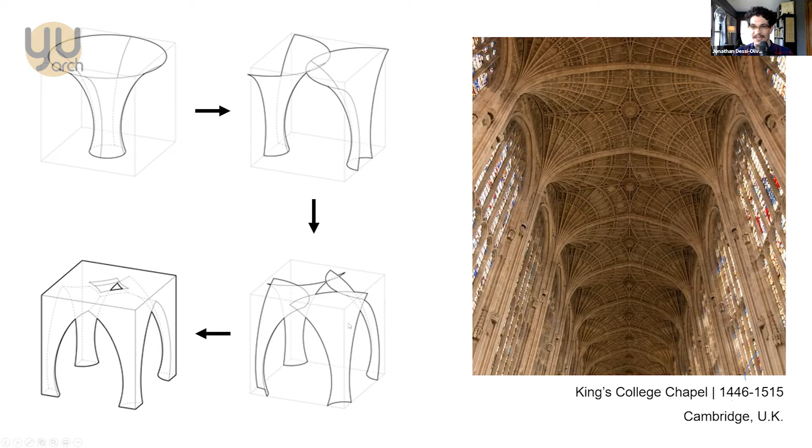The mushroom shape was actually shaped as a partial catenary. So when I split this thing in two and put them together that way, it actually makes a catenary in there, the shape of a hanging chain. And as I rearrange the parts again, I just get that going in the other direction. So again, that shape is immensely important.

But almost more important than calculating the right shape is describing that shape using formwork of some kind. As you saw from the picture with my students, the grains are loose when you're packing them. It's exactly like concrete in that you pour it, or more like compressed earth, I'd say. You compress it into the mold. The mold has to be strong, able to support the weight of wet agricultural waste while maintaining the form.

This particular plastic structure had some difficulty. You can see right here that due to the weight - and again, I was not here on this day to fix this - they actually let this arch have this sort of misshape in here. That was due to the flexibility of the formwork. So again, it has to actually keep the shape, or else you'll end up with a shape that's not strong.

The other thing is that the formwork, if you'd like to remove it, cannot be made of cellulose. So wood is not allowed. You must use something like plastic or foam or some other material that the mushroom cannot eat. As I've mentioned, the mushrooms also need oxygen to grow, so it's important that the mold you make is porous.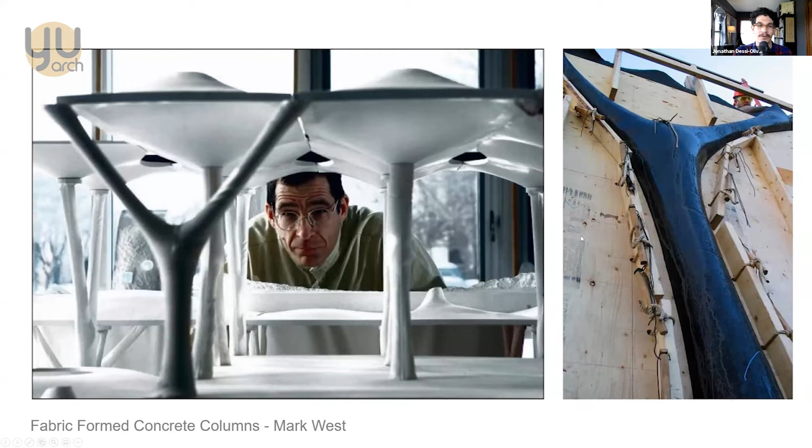Our catenary shape was very precise, cut with a CNC machine. We really learned how to do this through research. If you know anything about fabric formwork, Mark West is the master at this. What we noticed was you need a very rigid element and a very flexible element, but the rigid element must hold the flexible one. In our own way, we adapted this technique to make something for ourselves.

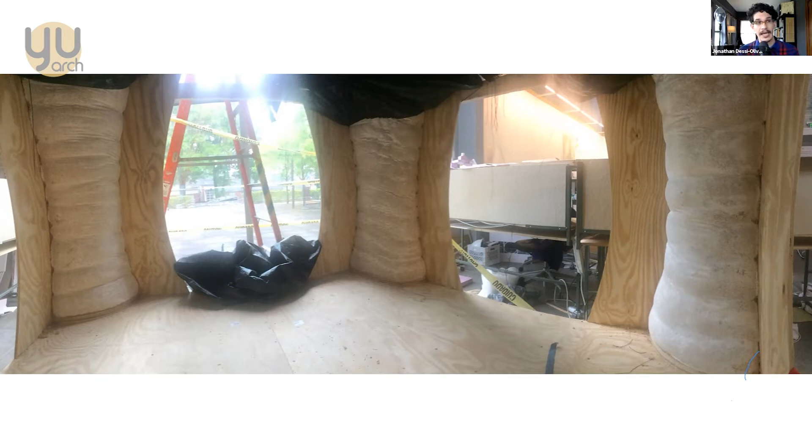These are some of the legs of the pavilion just 5 days after packing them. It grows very quickly when it grows well. We used geotextile in this case because it's woven and lets the material breathe quite a bit.

As I've talked about this internal reinforcing, it's an important consideration, but perhaps not essential. In our case, we were building something with a new technique at the biggest scale we'd ever done, so the safety you get from reinforcing on the inside was essential. It's important to note that while the exterior formwork, which was to be removed, could not be made of cellulose, the internal skeleton is something you actually want the mushroom to attach itself to.

To me, this is more interesting than the relationship between steel rebar and concrete. We know that relationship is tenuous, because after some years steel rusts and corrodes, causing weakness inside the assembly. In this case, the mushroom eats its way a little bit and attaches itself fundamentally to the internal reinforcing. It's a pretty interesting analogy: in concrete, steel is something it doesn't like, but in this case, mycelium loves anything made of cellulose.

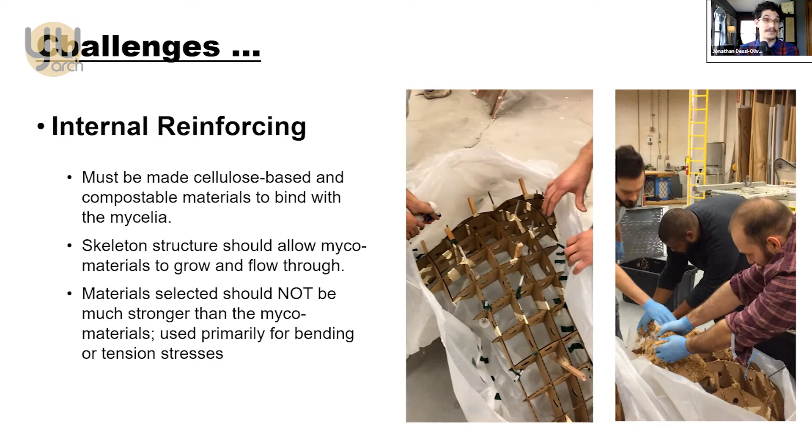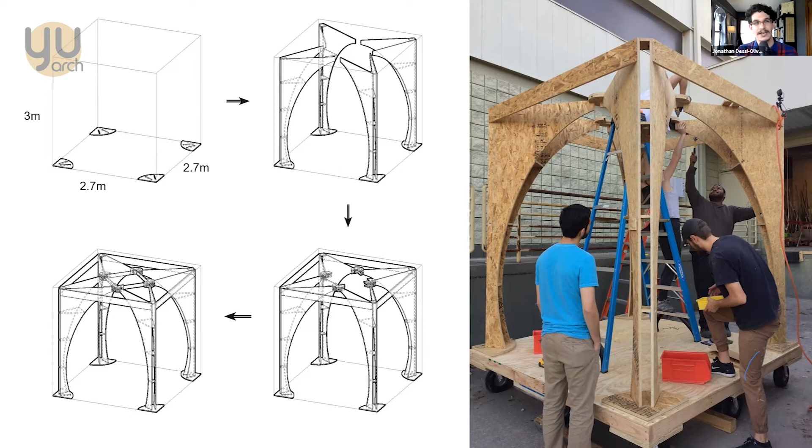For the pavilion, we used what's called oriented strand board, a panel product made of wood with a lot of glue. This was a decision I made because this was a very big structure going into a public place, with students sitting underneath it, and I could not take the risk. But in its production, we were able to demonstrate that a mushroom column does in fact make this shape, which was rather enjoyable to play out.

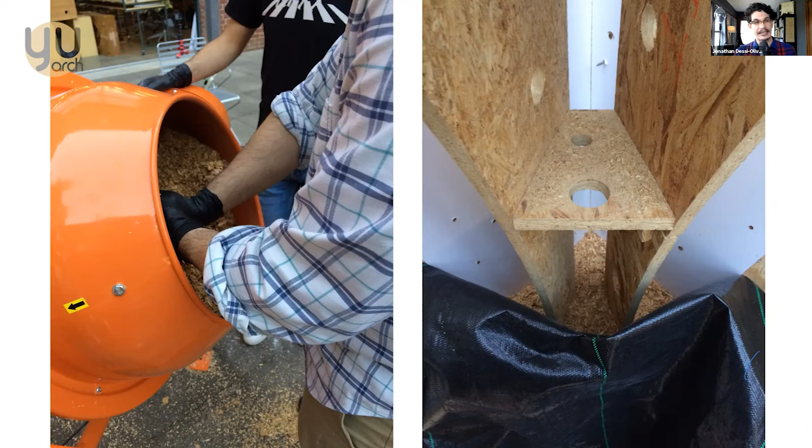Again, the internal skeleton was another means for us to guide where we were putting the mycelium. The workplace looked a little strange, a bit like a concrete work site, with people banging bags against the ground trying to break them up, mixing flour in, and a mixer over there. There was a lot of material, and we had to invent ways of working that day. As a team, we didn't know what we were doing at first, so hour by hour we came up with systems, means of communication, processes, and quantities to make things go the right way, and little by little made it. It was a wonderful experience, but even more important for what we learned.

When it comes to this internal reinforcing, it was made of wood, very strong, very rigid. As I've mentioned, mycelium has air inside it, and because it's a natural material, when humidity and temperature change, it expands and contracts. The skeleton on this pavilion did not expand and contract with it. In Atlanta, which is extremely humid, this material was expanding and contracting quite extremely in its first month, and it started developing cracking because the internal skeleton was breaking the membrane of the mycelium. What transpired was essentially a process of decay, as it rained on the structure and the temperature changed—it gets very hot in Atlanta and then dries up at night—so the whole thing was expanding and contracting.

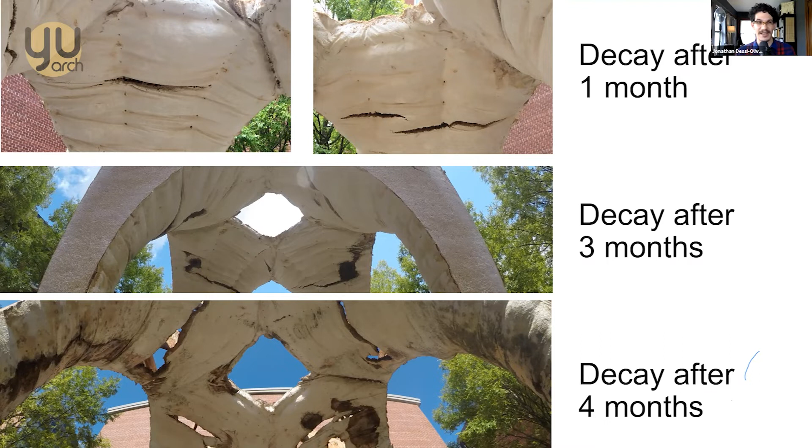We took it down after 4 months; it was looking pretty bad. But I kept 2 of the legs just to see what had happened. The degradation happened because it rains a lot in Atlanta, and water was running down the side of the column and accumulating. 12 months later, you can see this oval shape where water has come in and damaged the material. At first the mycelium was protecting, but then it started acting more like a sponge. Still, from this bottom edge up to here, we have full growth—so we did manage to grow a pretty decent thickness.

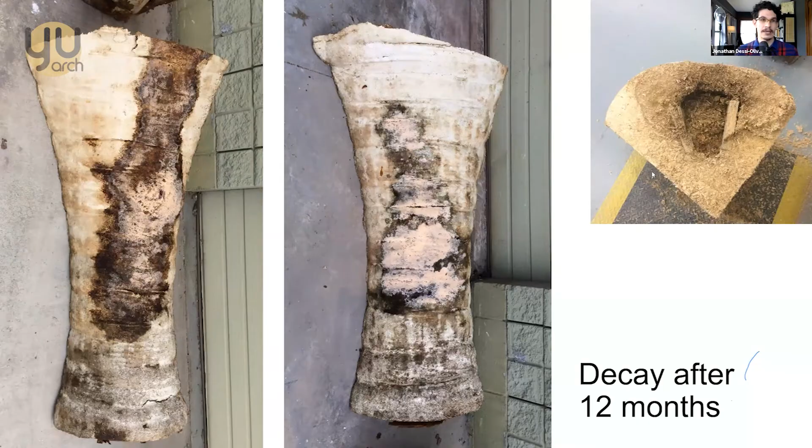I'll wrap up by talking about what's going on now, since that pavilion lasted 4 months and happened in 2018. As I mentioned at the beginning, that pavilion was done while I was doing a fellowship, and now I'm working as a professor at a different university. I've been settling in for about 2 years and finally managed to gain a grant to work on this here.

I'm working with a fungal geneticist and an economist who specifically works in agriculture. We're working on fairly large topics dealing with the economies of rural environments in the United States. This is a platform we're building where we look at the very small scale, understanding the biology of how these mushrooms grow, their genetic makeup, and if necessary genetically modifying them for more favorable material properties. We're trying to connect the micro, the nano, even the molecular, with materials that exist at the human scale.

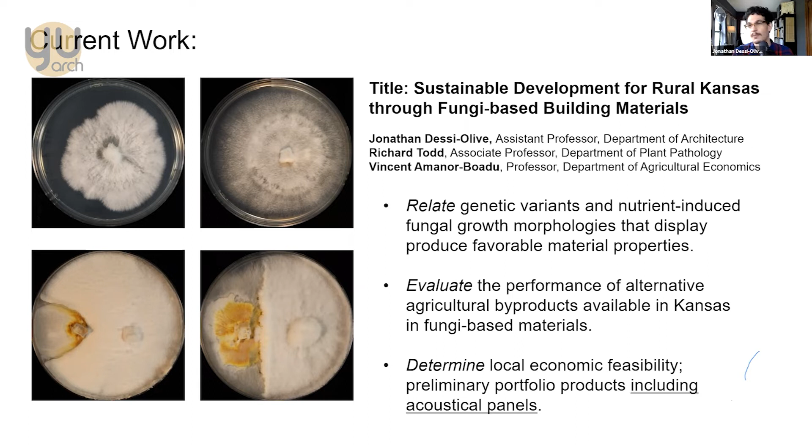This is what we're interested in, and we know it's a very big question. It requires studies and economic models that look at things like where the agricultural waste is, how you move it, and even if you knew which mushroom to grow, what could you make, and does it have higher value than just being compost? These are very interesting questions that I can't tackle alone, so these diverse collaborations are just underway now.

I'm also teaching a seminar on this topic, and my students are working on it now. We're working in an extreme sustainability mode using no plastics at all, questioning why we need plastics, and questioning how we form the material even though forming it is necessary. One of my groups is looking at basket weaving techniques to make the formwork they pack into. Because basket weaving is made of cellulose material, the mushroom just grows right into it, which is quite fascinating.

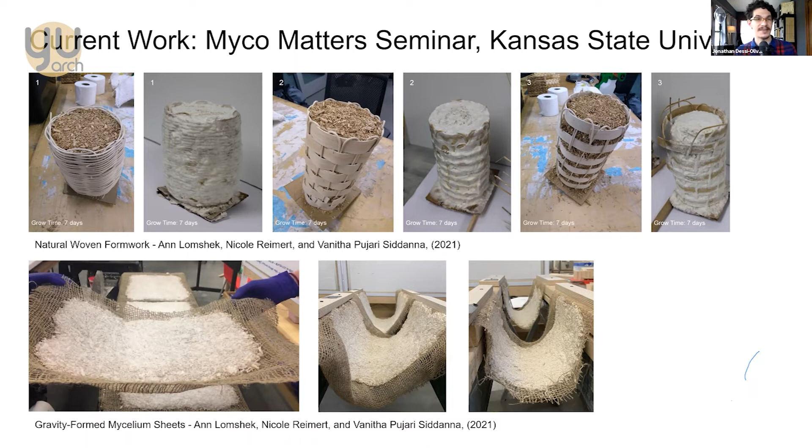They're going to make a pretty tall column, something like 2 meters tall. Another group is using techniques of hanging fabrics, using gravity as a means of forming thin mycelium sheets. We'll see where that goes, but this is just a little peek.

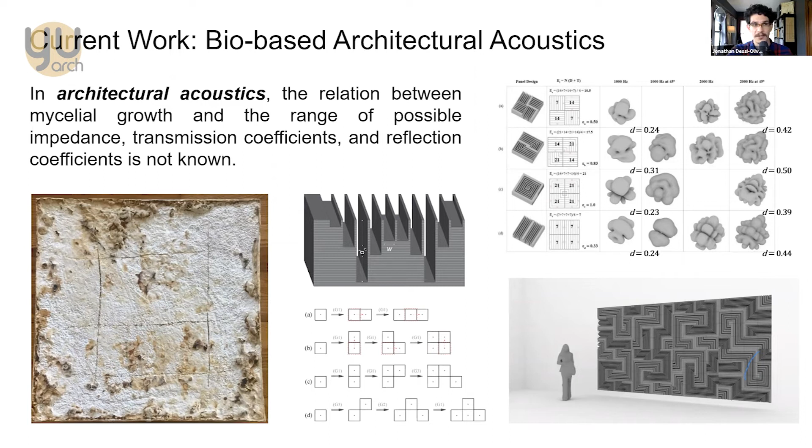In my own lab, we're doing research looking at the properties of mycelium and trying to associate them with acoustical panels. In addition to being a mason, I'm also a musician, and I've been working on an acoustics project that uses a computational design methodology called shape grammars. We're using simulation, and now making panels out of mycelium, which is very exciting.

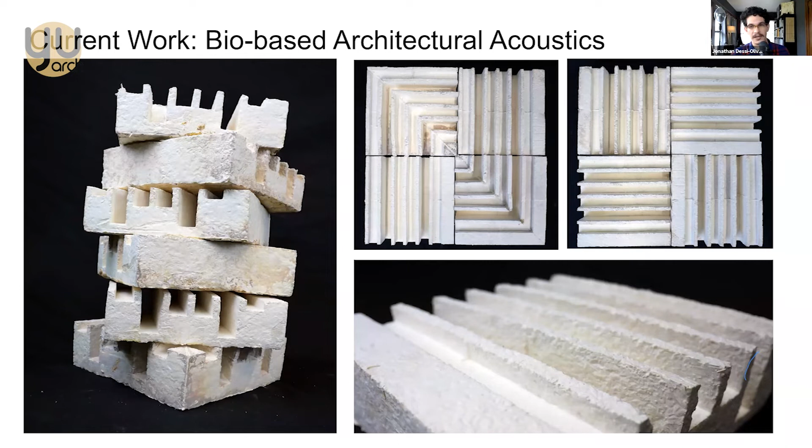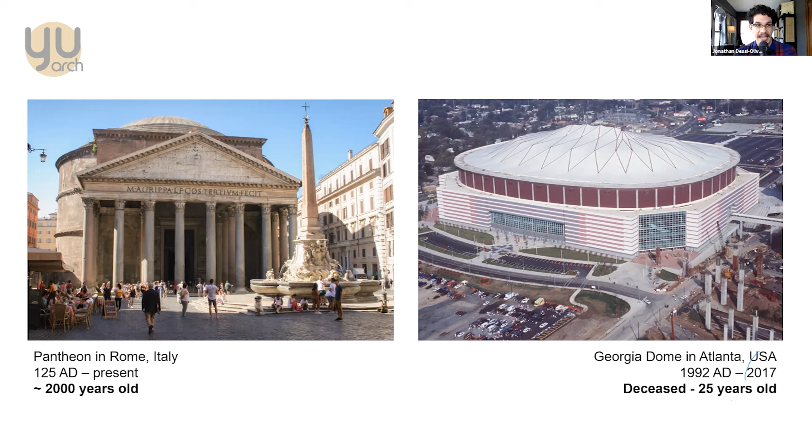So again, I think we have to come back to this original question: why should architecture be permanent? If it is permanent, what materials should we use? And if architecture is to be less permanent, more temporary, can we start to think of new ways of building for tomorrow? I'll leave you with this question—it's one that's very important to me.

It's what I think is necessary, not only for us today, but really to have a sustainable life on this planet. We really need to think of the impact that we as architects have when we build things on the planet.

Thank you so much for your time and for listening to me. I'm sorry I went for a whole hour. I spoke a little slowly, I hope, but I'm more than happy to discuss at length and cover anything else, any questions you have about the structure or about the future of this material. It's something I'm very passionate about, and I hope that after this, you too can be passionate about it. So thank you very much.

Thanks again a lot, Jonathan, for this very clear, explainful presentation, and taking it to a point that I didn't think about: do we need permanent buildings for the future? That's not something that is even taught, I guess, a lot in Turkey. I have not seen so much, as I have seen, these kinds of problems, not yet at least, breaking down old buildings, but we have earthquakes that are breaking down buildings. So that's something really interesting to think about. What we do after a building is getting... we don't want it to be destroyed, but it might be.